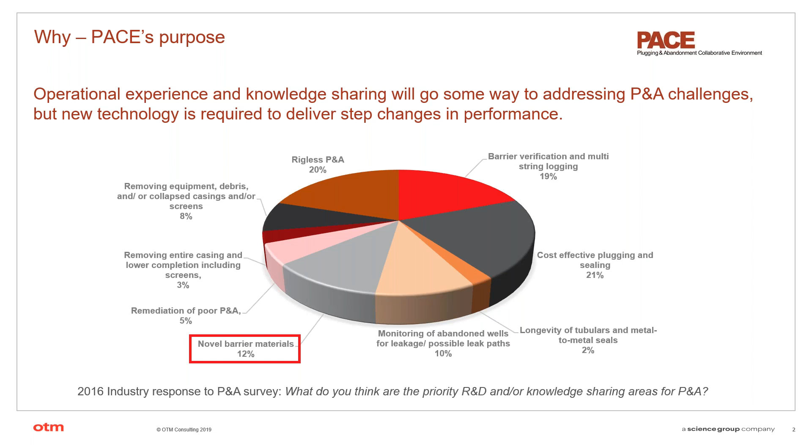Back in 2016, my company OTM conducted an industry survey where we asked what are the priority R&D or knowledge sharing areas for plugging and abandonment. The results are what you can hopefully see on your screen. Really the four big ones were cost-effective plugging and sealing, rigless P&A, barrier verification and multi-string logging, and novel barrier materials, which you can see highlighted.

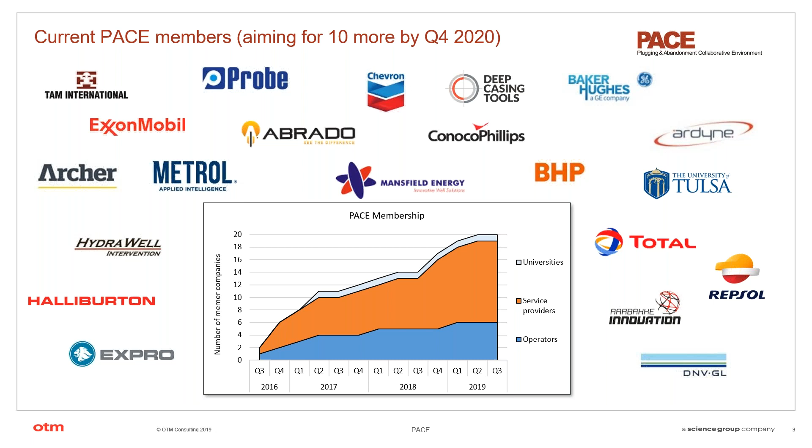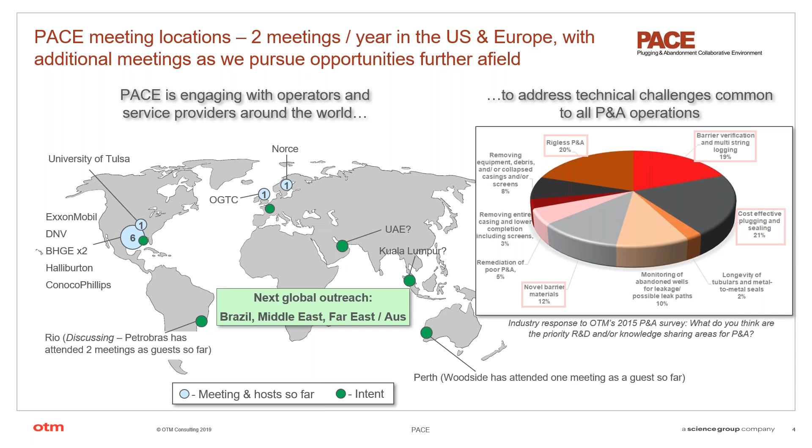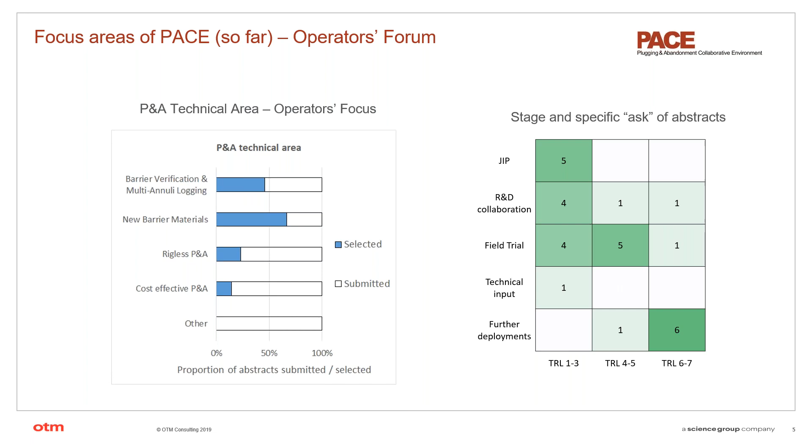Just a quick word on what the operator members are selecting in terms of abstracts submitted for the meetings. The highest proportion of abstracts selected are indeed in new barrier materials, which from PACE's perspective tells us that this is an area seen as a great opportunity by the operators in terms of cutting costs and safely and effectively P&Aing a well. So that's all from me.

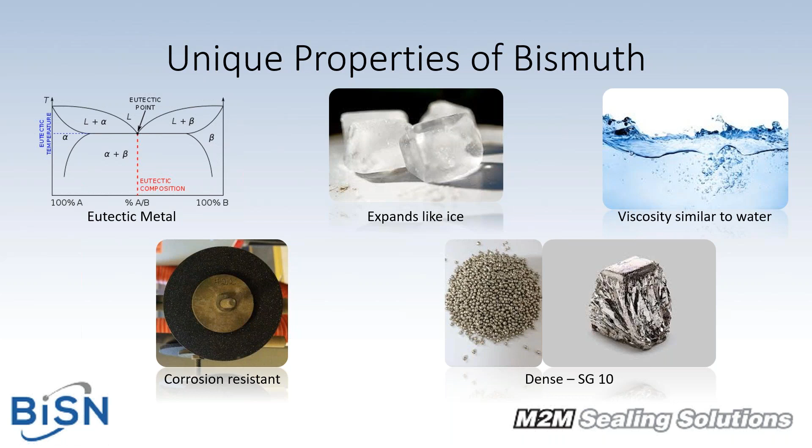So what do we do differently?

Well, we're using a thermite reaction heater rather than an electrical heater. Electrical heaters are great, and that's what the majority of people have used for this in the past, for the last 80 years or so, because you can control them very easily. You can turn them up and down, turn them on or off as required.

With the thermite reaction, we get an awful lot of heat. It's a non-explosive chemical reaction between iron oxide, rust, and aluminium powder. You put the two together in the right quantities, with the right grain size, heat it up to about 2000 degrees C, and it starts a chemical reaction which produces liquid iron, heat, and aluminium oxide, and we use that heat to melt the alloy downhole.

All sounds very simple, but it's taken us 8-9 years now to try and perfect the thermite reaction, to really control it, to give it as much control as you do with an electrical heater. That's done in various ways by adding various other chemicals to slow it down. So we're now at a point where we've effectively got a very, very controllable thermite reaction that we can use to melt the alloy in situ downhole at any depth. The deepest well we've done to date is over 20,000 feet deep in the Gulf of Mexico.

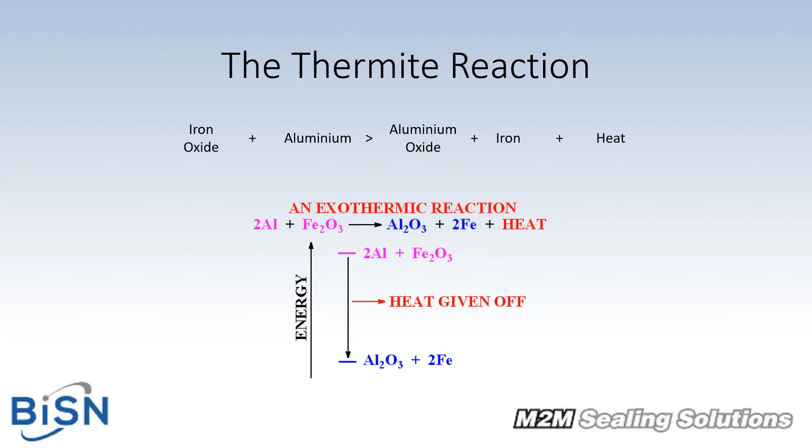So the best way to think about this technology is a big candle. If your thermite reaction heater is your wick and your alloy is your wax, we run that big candle downhole, we start the thermite reaction, it melts the alloy, which then runs and creates a seal and basically expands on solidification. I've got a short video that I'll play that will show that.

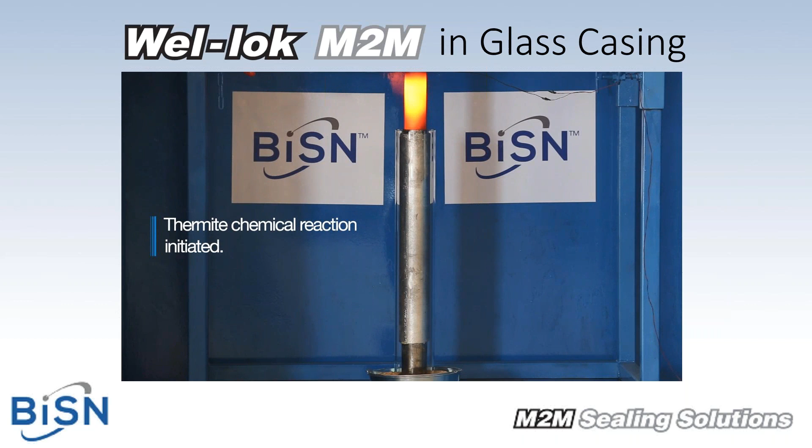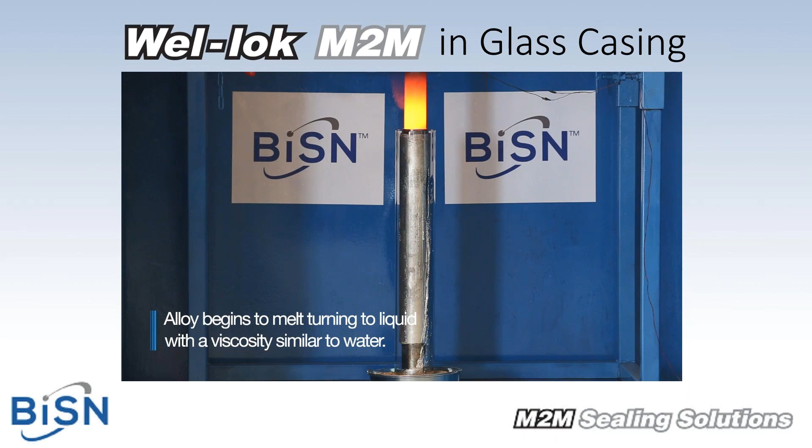So you'll see at the beginning of the video, we've got a heater sticking up, which is like a matte grey metal pipe we've ignited. That starts to glow hot. It moves from top to bottom. As it moves top to bottom, just like a candle, it melts the alloy on the outside like wax, and you can see the alloy now starting to melt, and it trickles down and forms a base.

It forms its own base, basically because it's eutectic, so it has a very sharp melting and freezing point. A 1 degree C difference, or a couple of degrees F difference in temperature, becomes a liquid or a solid. As you can see, very, very quick reaction - a couple of minutes - we can now melt approximately 10,000 kilos or 20,000 pounds of this alloy in less than an hour downhole.

Very simple, but very effective. So to just touch on some of the field experience that we've had, late last year, we did a job for Aker BP in the North Sea. This was a well that they were P&Aing, and before they set our tool, they went in and perforated a shallow gas zone to actually create a leak underneath where they wanted to set our plug.

And it did. Apologies for the O-ring that was there, that fell off the BOP in the hour or so between setting the plug and the camera run, and the company never actually told Aker BP that they'd dropped that O-ring down the well, so they were a little bit surprised to see that on the camera shot.

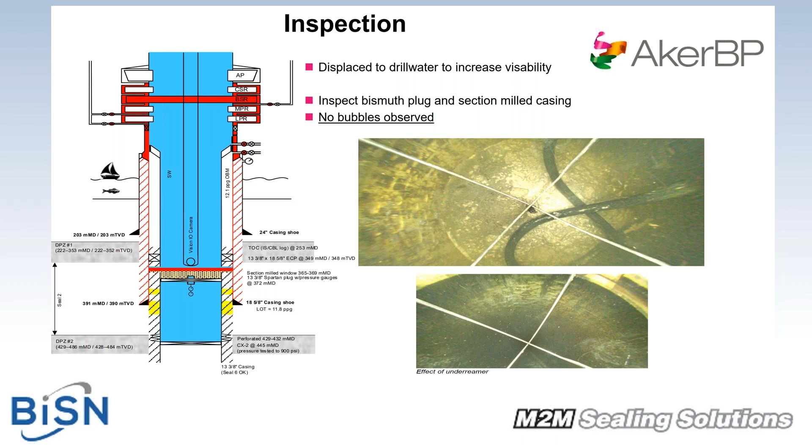Since then, it's been on long-term pressure test continually for the last 15-16 months now. They also have a memory gauge below, and they're going to retrieve that early next year to prove that there has been a gas buildup underneath. They also did straight after setting it a 1.5 hour pressure test on it as well, and they also did the camera run. So we really have done as much as possible to verify that we've created a good seal, and that will be all confirmed next year.

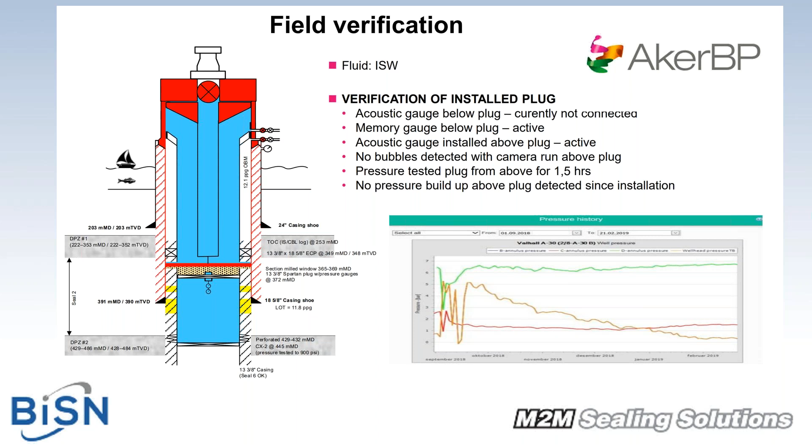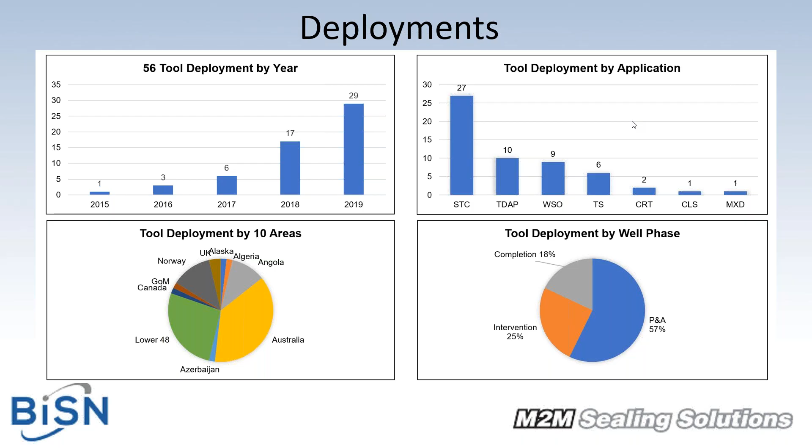I'm Richard Nielsen from the National Decommissioning Centre. For those who don't know, it's a collaboration between the University of Aberdeen and the Oil and Gas Technology Centre in Aberdeen. We were set up in January this year.

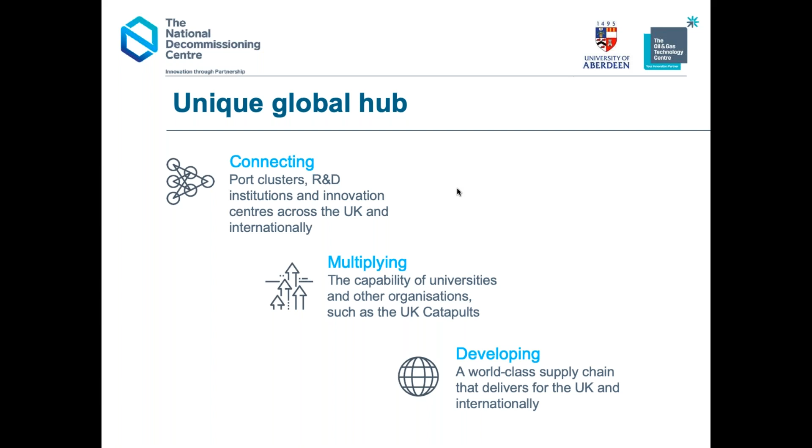The idea of the centre is to become a hub for research and development for decommissioning. Obviously the university can't do all of that itself - we're a reasonable sized university, but not huge. So we're looking at how we work with other universities and institutions to capitalise on those in terms of research. One of our other main aims is to help the local supply chain develop its capabilities in decommissioning, both for the UK and internationally.

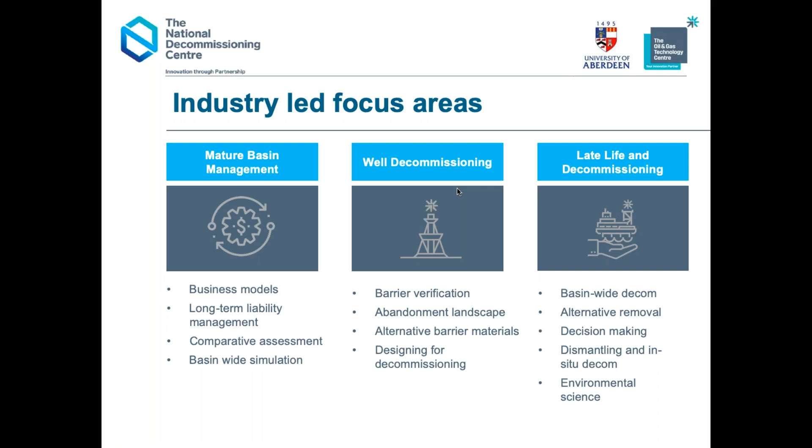For new barrier materials we need to be able to do some realistic testing. The previous speaker talked about work they've done on well interventions already, but we need to mimic high temperature and high pressure environments, with repeatable and consistent testing. We want to do lab testing and give operators confidence that the proposed solution will work before being deployed in the field - even for the more extreme technologies.

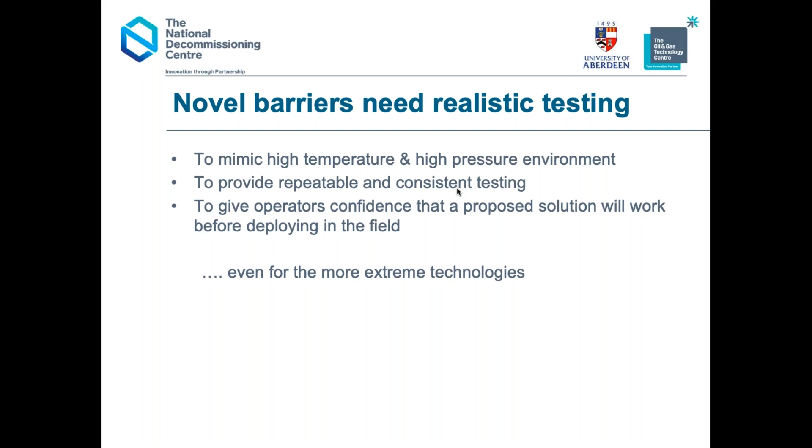By extreme, I mean some of the thermite technologies out there, which are quite challenging to test in-house. So we got together and used some stakeholder engagement mechanisms - one through the Oil and Gas Technology Centre's alternative barrier materials group, and we also used Oil and Gas UK's plug and abandonment group.

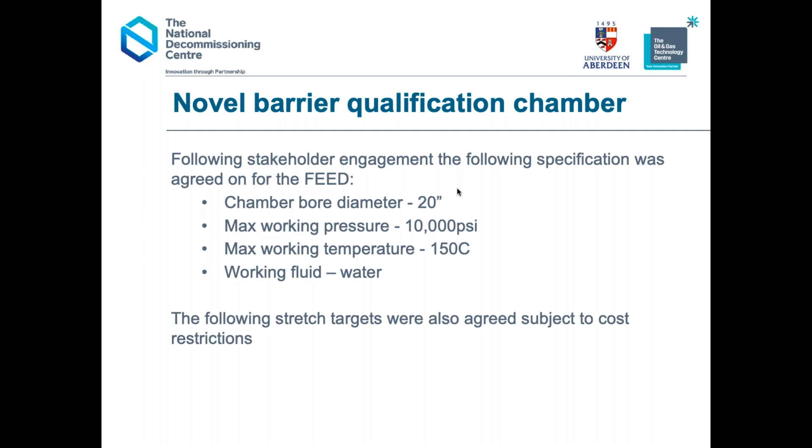Out of that we got a requirement that if we're going to build a testing chamber, it should be about 20-inch diameter, maximum working pressure 10,000 PSI - although some operators were pushing for much higher given HPHT wells - and maximum working temperature 150°C, starting with water as the working fluid. We also put some stretch targets in for the FEED study, primarily around temperature up to 200°C, and potential for working with brine, which has implications for materials choice.

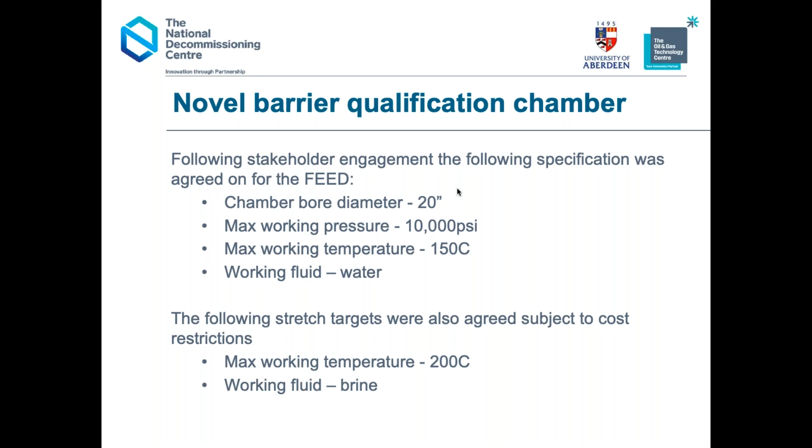So we set that feed study off earlier this year and worked with a group called Apollo, who have come up with the outcome for the feed study. This is the initial concept - in the centre there, the red item is the test chamber.

So 20-inch diameter, about 10 meters long. We have on the left-hand side the grey piece beside the loading bay, which is kind of a skid, where we can build a cartridge, slide that into the chamber, and then do the testing.

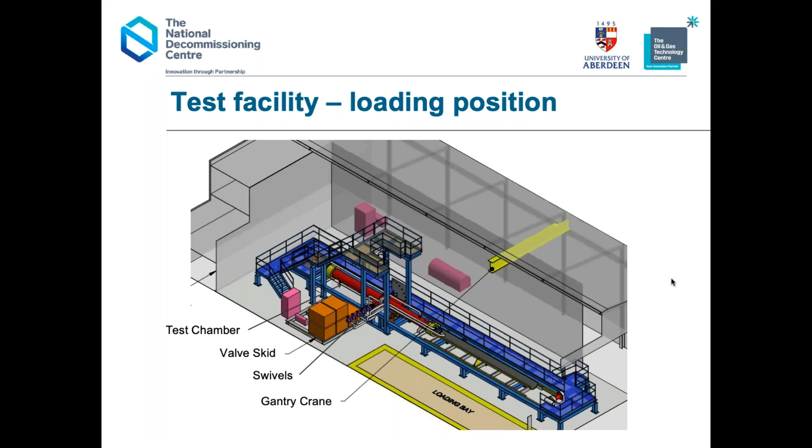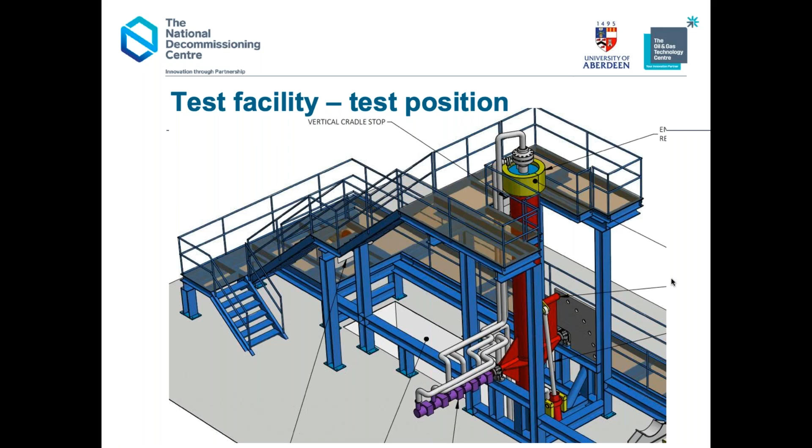The swivels we've got there are because the loading position is this horizontal position, but the actual test position is this vertical position. So we will load horizontally, then put the chamber vertical. On the right-hand side, there are a series of lock points. We could actually have different inclinations, so if somebody wanted to test at 45 degrees or 60 degrees, we could do that as well.

So in terms of building this thing, the idea was to try and build something that was very modular, so that whether it's a bismuth alloy test or a thermite test or a resin test, a company can come in and do that, and we've got a standard formed cartridge.

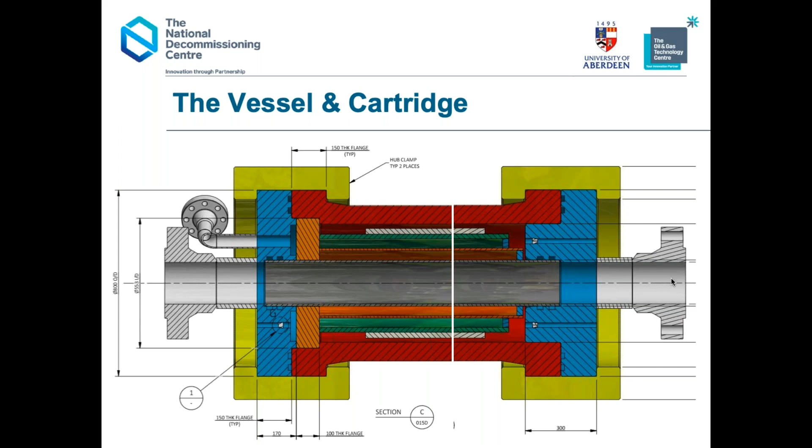The idea was the red part here is the pressure chamber, the two blue parts are the end caps, and the yellow parts are the locking rings which hold those end caps in place. In the center, we've got a fairly standard cartridge layout, which will allow us to have different tubing assemblies or casing assemblies, and various annulus as well.

So the cartridge concept, the idea was to have some sort of standard interface to the test vessel. We've got casing that can be welded directly onto the end interface. We've got ports for annulus return flow, and we can put pressure and temperature sensing in there.

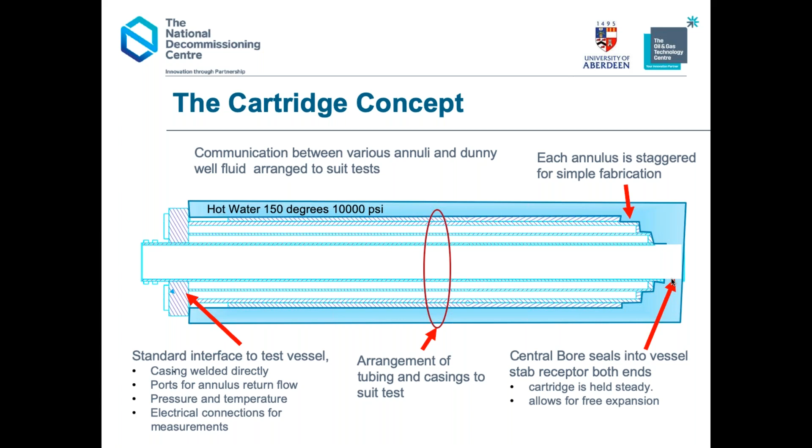The arrangement allows for quite a wide range of tubing and casings to suit the test, as long as we're within the 20-inch diameter. At the right-hand end, we've got bore seals which stab receptor at both ends to hold the cartridge steady and also allow for expansion. So we tried to build this so it's as simple as possible, and we've got hot water jackets around the outside which allow us to heat things up.

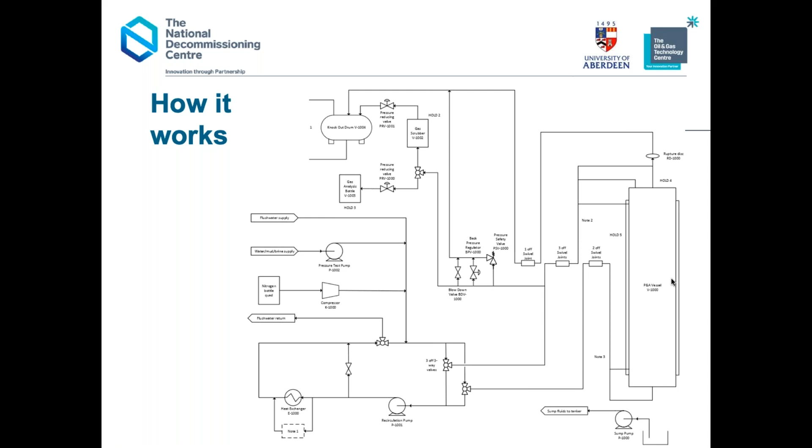In terms of the process flow for this, we try to keep it fairly simple. On the right-hand side we've got the vessel, and on the bottom we've got the flow. So we've got a primary flow loop of 10,000 psi, and this configuration is shown flowing through the bore. However, the valve pack that was in the drawing earlier on allows us to change that and flow through the bore and out through the annulus, or vice versa.

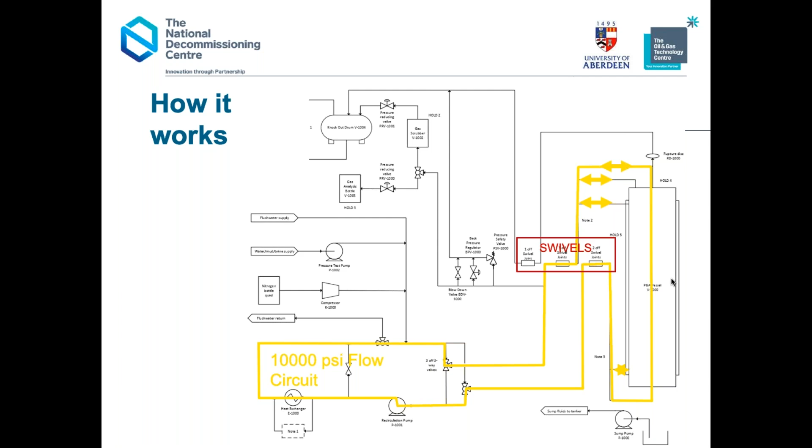So we've got quite a wide variety of tests we can run from this system. We've got the swivels, which allow us to change the angle of the chamber, a pump for the high pressure supply, and a thermal oil heat exchanger, which allows us to heat up the fluid being flowed through the system up to 150 degrees.

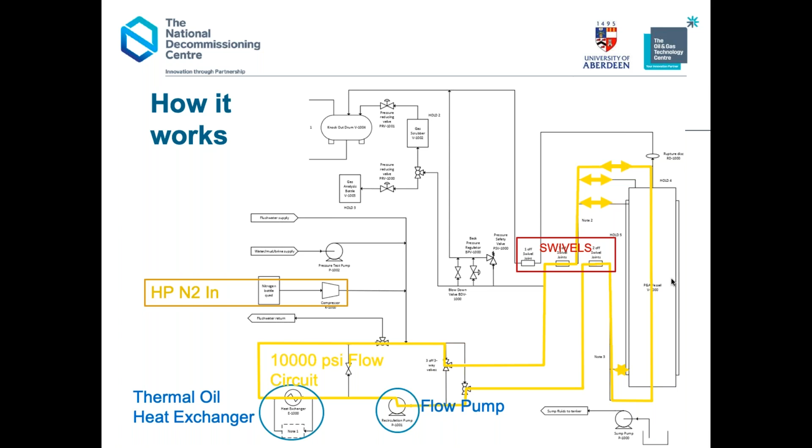We're aware that some of the tests we've got will probably need a gas cap to allow for some of the expansion in terms of liquids. So we've got a nitrogen input, and we've also got a water input for the initial flood. Given the fact we're talking about quite high energy systems, one of the key things is having a high pressure relief and scrubber system, so that we're running very safely.

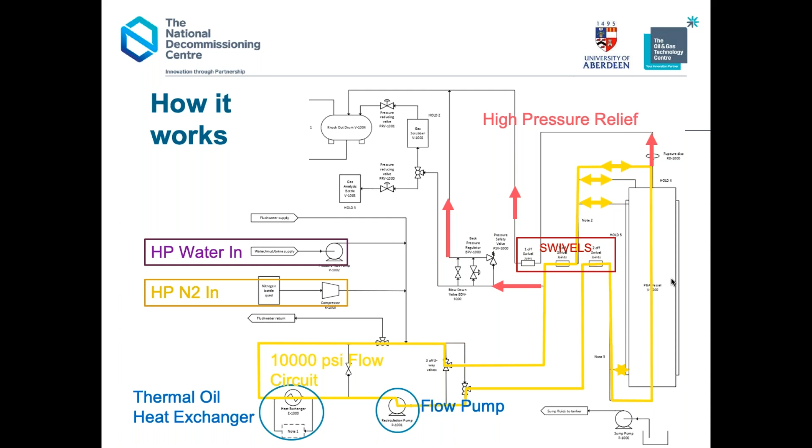So basically what we've defined is how a test might be conducted using this kind of cartridge system, which is very flexible. We can adapt to almost any oil field equipment, not just plugs. We've got a variety of modes of operation because of the way the fluid system is set up, so we can have inflow from well or rock, and we could have flow through the annulus.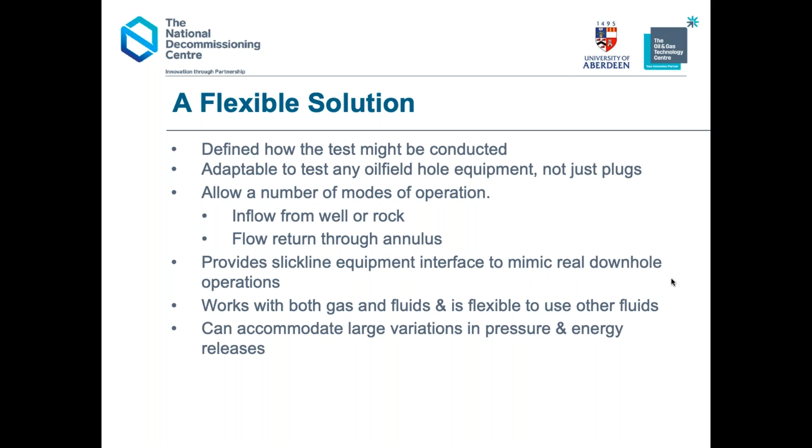We've tried to leave enough space in this to allow for slickline equipment interface to allow downhole operations. We should be able to work with both gas and fluids, and there's flexibility for other fluids as well - that will come down to the materials we finally design to build the system with. We can accommodate large variations in pressure and energy releases, particularly with the pressure release system we've got, and we can take casing sizes up to 18¾.

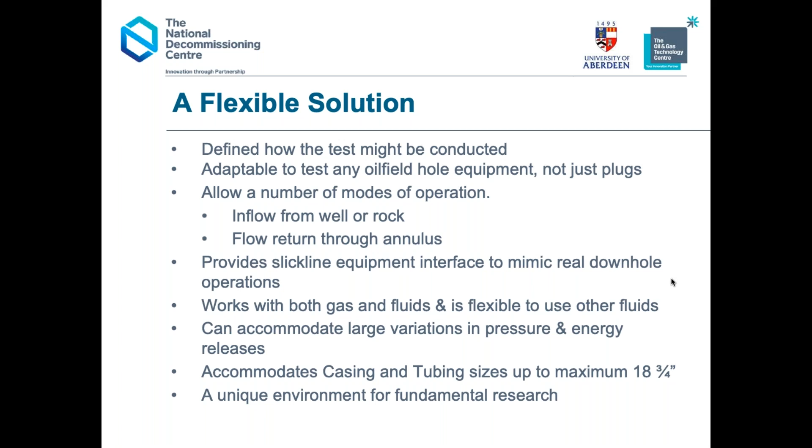I think what we've been trying to do is set up something which is going to be a fairly unique environment for fundamental research, but also a great opportunity for developers particularly, but also operators, to use for some of these new tests and new materials. I just want to acknowledge that this was supported by the Scottish Government through a grant from the Decommissioning Challenge Fund for this FEED study.

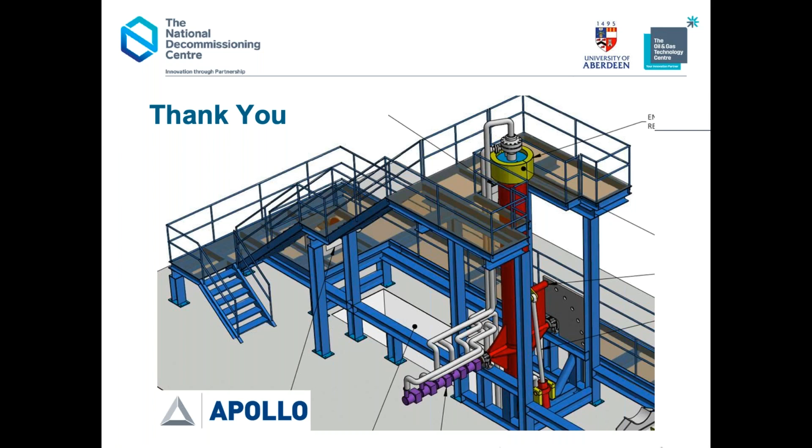Hi there, my name's Philip Head from Panda-Seal, and I'll just go through briefly what we're working on towards using thermite and low temperature alloys.

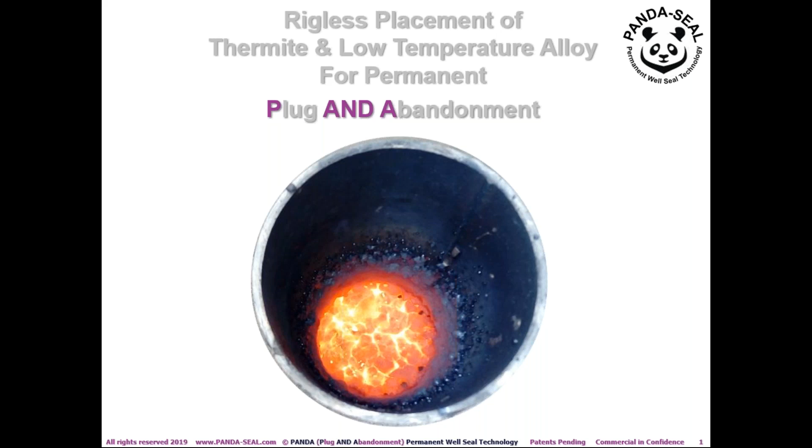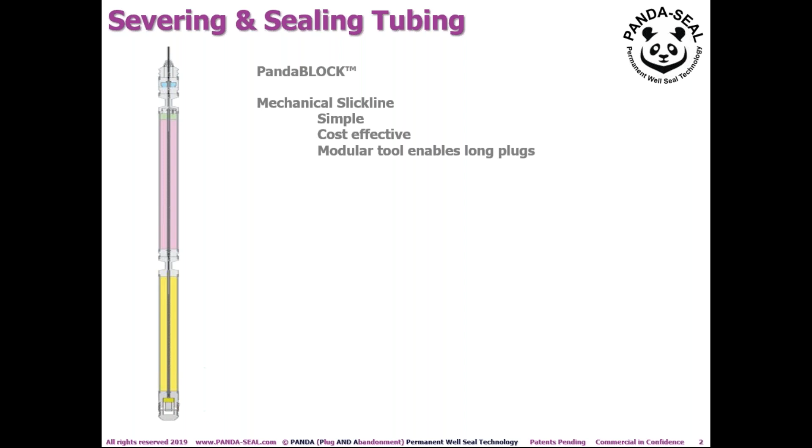First of all, we're looking at severing and sealing tubing using slickline. We have a system we call PandaBLOCK, which is basically a simple mechanical slickline tool to reduce the cost of a through tubing abandonment. So it's cost effective, simple. The tool's modular, so we can make it contain different materials such as thermite, bismuth, and other materials.

We also have another system where we're using fiber optic slickline, which gives us additional advantages such as performing logging runs prior to using the thermite or the sealing material, so it can optimize the placement of the sealing material inside the well.

It has obviously smarter tool functions. It can set the bridge plug. It can activate the initiator at will. And because we have a fiber optic cable going through the whole tool, we can monitor the thermite process in real time. One of the things we're quite conscious of is controlling the initiation process of the thermite reaction.

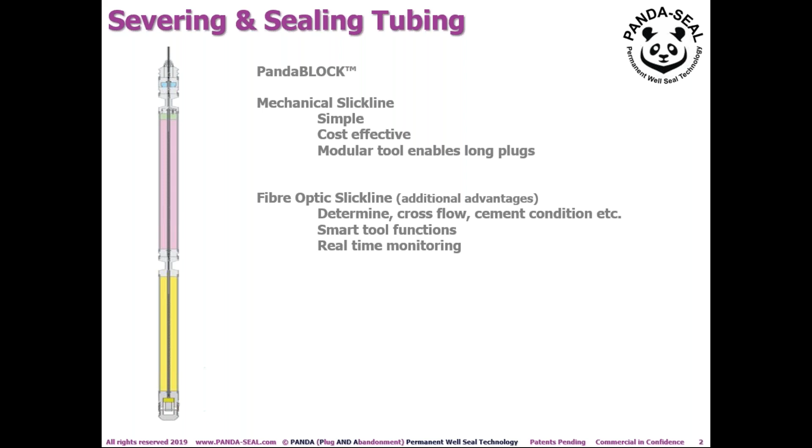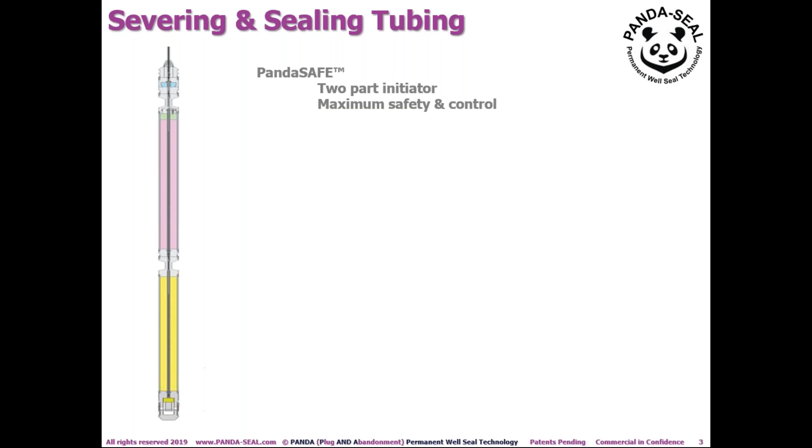Part of our philosophy is to make that totally safe. How we're doing that is we have a thing we call PandaSAFE. It's a two-part initiator, and it allows us to separate the initiation in two separate runs. So we basically deploy a wet connector and have a lower half with the initiator in, and an upper half where we go and deploy into the well the initiation process.

As we land that assembly, the initiation process will start, and it's a totally safe, controlled initiation of the whole process in the well itself, and there's no possibility of anything happening, and it obviously eliminates expensive electronic hardware.

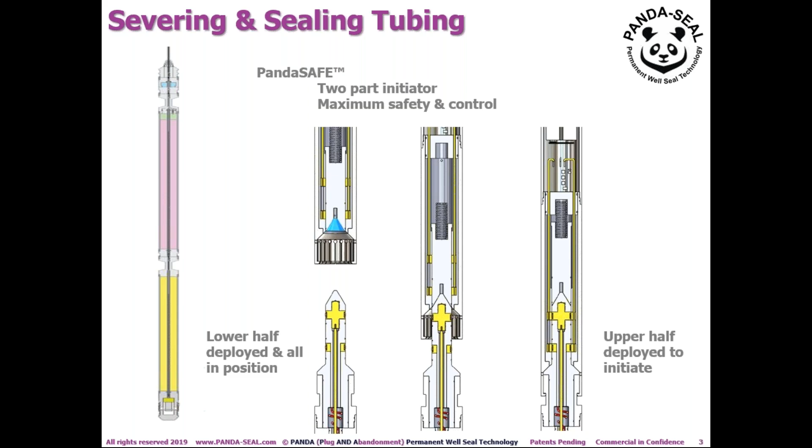That is our tubing and sealing process. Then we have another process where we want to sever and seal nested casing. Here, we're deploying cartridges which have RFID tags, and we can deploy as many of these cartridges in the well as required.

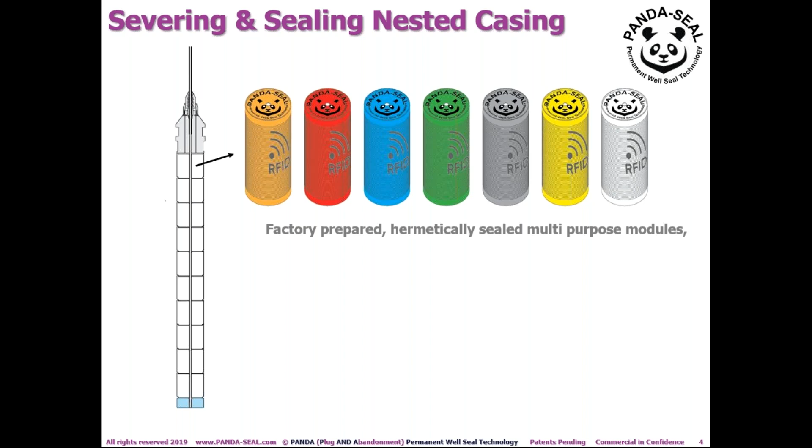These cartridges are filled and delivered to the well site. And when we deliver them to the well site, we know exactly what's being delivered. It could be a variety of things like low temperature thermite, high temperature thermite, propellants, either solid or liquid, the initiators, bismuth, or even resins and weighting agents, and thermal insulation, which I'll come to in a second.

The fact that we're using the RFID means that each of these cartridges can talk to each other, but the RFID is totally passive. The fact that we can daisy chain information in both directions means we have a very smart system of communicating with the whole plug material itself.

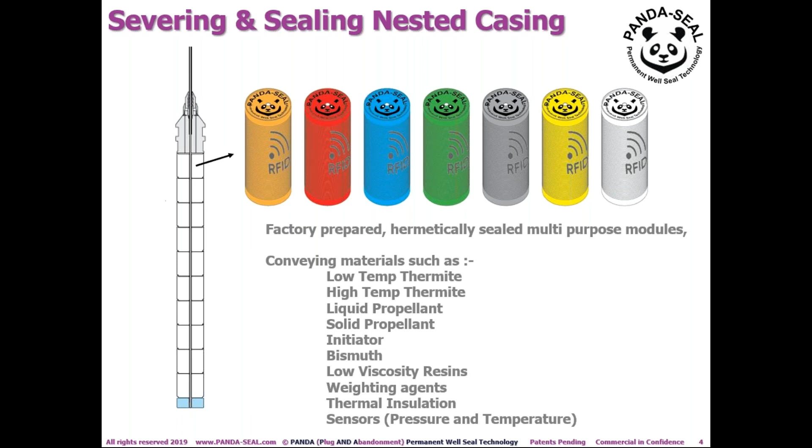In addition, it means that we have total control over the initiation process. So, for example, if we wanted to sever a casing which is beyond the tubing we've already severed, we would deploy these cartridges into the well, and all these cartridges, when we want to talk to them, will talk to its neighbour and are only active when we deploy a wireline tool.

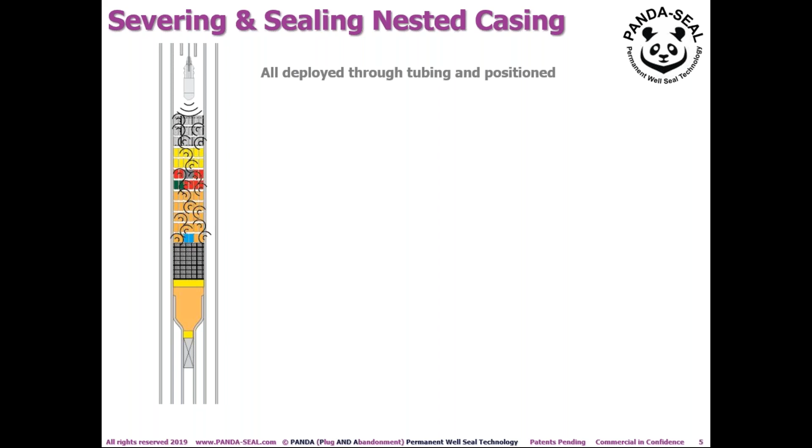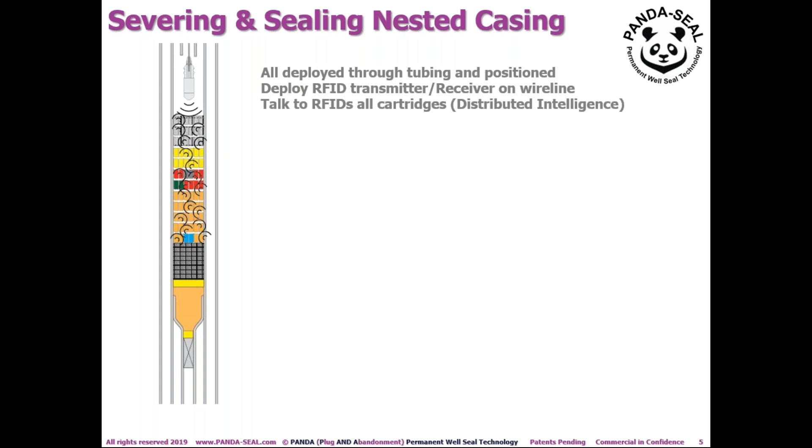So the wireline tool comes down after we've positioned all these materials in the right place. Once we start talking to the tools, each one is talking to its neighbour, and we can then activate the initiators at our command. Then once we've initiated the process, we can monitor as each of the RFIDs shut down and where they shut down, so we can monitor and log the thermite process in real time.

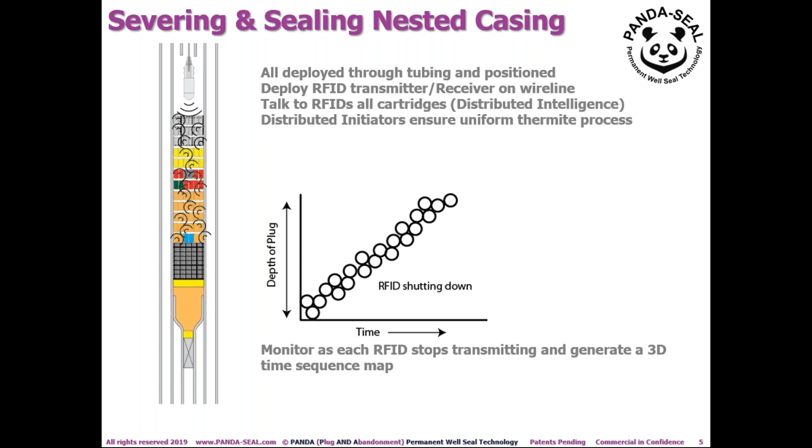Now, the next process I'm going to talk about, this might not be acceptable in some parts of the world, but we're working on this process in the Far East, where we're basically going to launch our cartridges from surface and use gravity as our means of deploying the additives into the wellbore. This will enable us to have much faster feeding of materials into the wellbore.

All the materials can be turned on only when we require. Obviously, the well is drifted before we install these. There's a large clearance for our darts to be dropped, and the darts are again multifunctional.

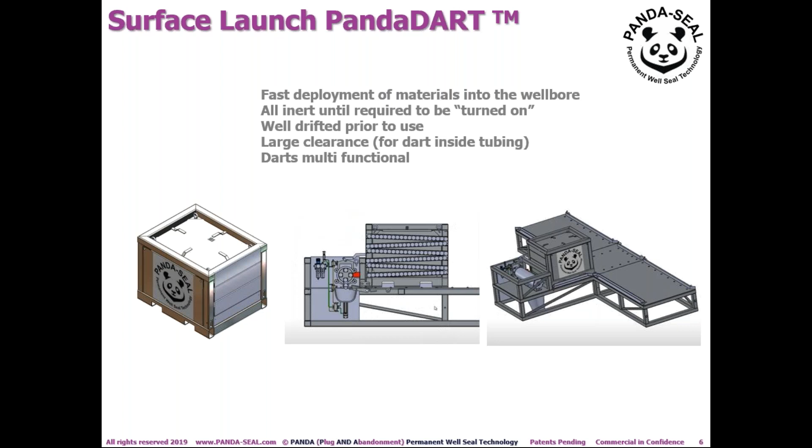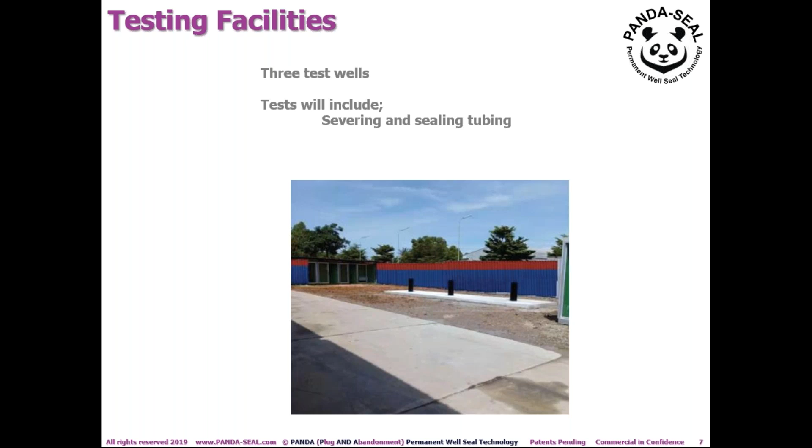Finally, we've built a test facility in Thailand, and we've drilled 3 test wells. We're going to be doing in these test wells severing and sealing of tubing, severing and sealing of nested casing, and finally demonstrating that we can sever the riser. This is all going to happen hopefully just before Christmas.

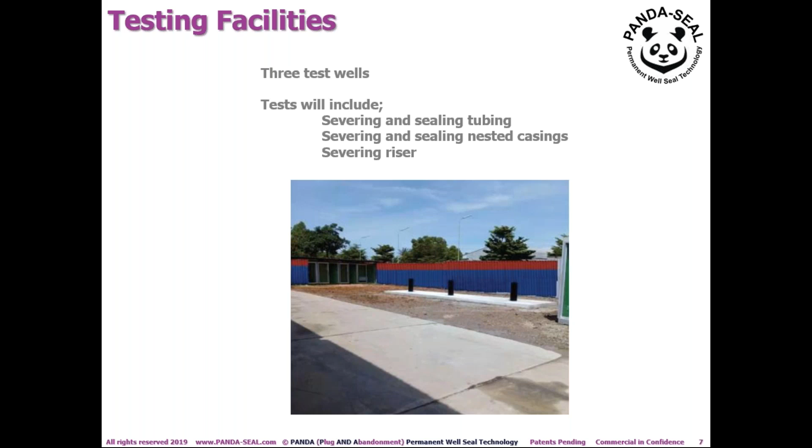We've had a few questions coming in as you guys were talking, so I'm going to read a few of them out. The first one is to Paul: what is the melting temperature of the bismuth?

Pure bismuth melts at 270 degrees C, but what we do is we mix the pure bismuth with different metals to create an alloy. So our melting temperatures of alloys range from less than 100 degrees C all the way up to 260 and beyond. Depending on what the well temperature is, we choose the relevant alloy for that well.

Great. And obviously the thermite reaction creates a great deal of heat. Is there any danger of it damaging the casing?

Not in our standard tools. As you saw on the video, it's contained in a metal pipe, and that metal pipe contains the thermite, so the thermite never actually gets exposed to the well bore. It's just a heater. We are looking at using thermite for actually severing the casing, a bit like Panda, but we're doing it slightly different. We're using a liquid thermite, but the intention there is to damage the casing, to sever it or basically remove the need to section mill. But in most of the bismuth tools, obviously there's no damage to the wellbore at all.